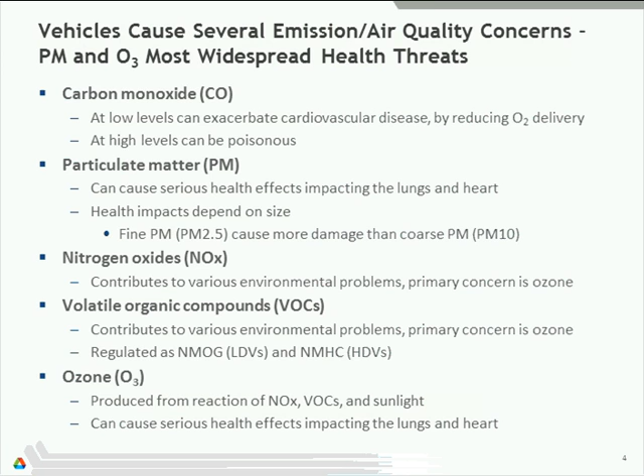So getting back to what we have done in this area, Argonne has supported Department of Energy's Clean Cities with various tools for the past 15 years. And in that time, we've been looking at air pollutant emissions as well as other emissions and environmental and petroleum use and other things like that.

So the first tool that we developed was AirCred, which estimated ozone precursor and carbon monoxide emission credits from alternative fuel vehicles for state implementation plans. That tool was around for about a decade. The next tool that we worked on was basically a tool for the Recovery Act grants to look at greenhouse gas emission and air pollutant emission benefits for those grant proposals.

And then most recently, we released the AFLEET tool, which estimates cost of ownership, petroleum use, greenhouse gas emission, and air pollutant emissions of light and heavy-duty vehicles. The tool is available on Argonne's GREET website as well as the AFDC if you haven't downloaded it already.

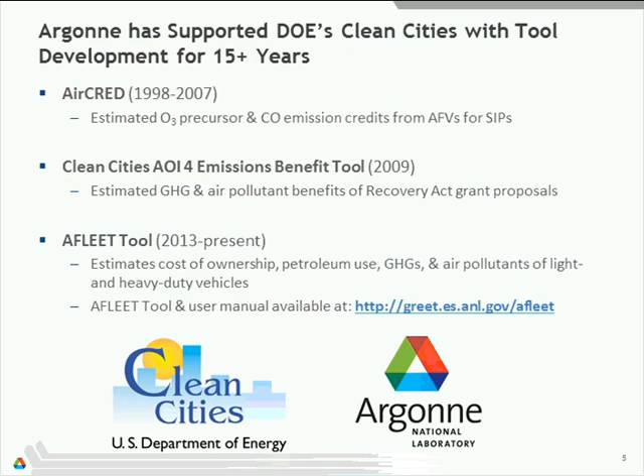So digging into what AFLEET does relating to air pollutant emissions, it really is based off AirCred, which we used for a long time. AirCred was a Department of Energy and EPA co-sponsored tool, and it was developed using EPA's MOBILE model, which is a model that calculates the emissions of different types of vehicles, light duty and heavy duty. It's a computer program. And then we also use annual emission vehicle and engine certification data to examine the relative impacts of alternative fuels and conventional counterparts like gasoline and diesel.

EPA is typically solely focused on gasoline and diesel, or historically has been. That's their charge, to really focus on the big emitters, so that's what they have focused on. But we do have data on alternative fuel vehicles and can make some assumptions to try and calculate, and that's what we did with AirCred.

So we followed that approach with AFLEET, but we now use EPA's MOVES model for gasoline and diesel emissions. The MOVES model really updated what MOBILE did. It basically improved the ability to estimate air pollutant emissions and showed that the NOx and PM emissions from vehicles were actually much higher than the previous estimates that MOBILE had done.

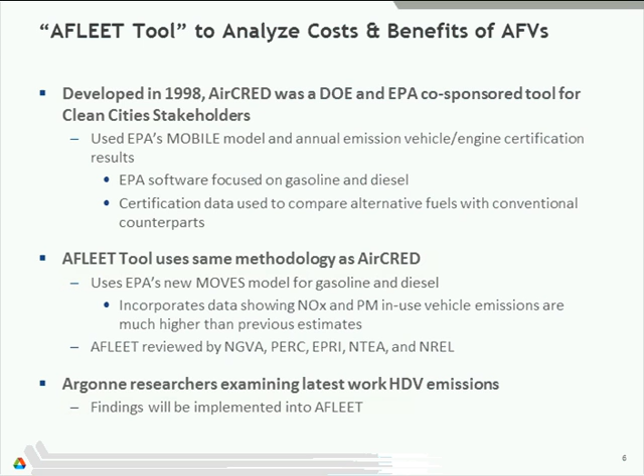And then as part of this process, we went through the various fuel associations to show them what we had done and try to get some peer review on the tool. So that was an important part of this process. And we plan to continue to update the tool. Argonne researchers have been examining the latest work related to heavy-duty vehicle emissions. That work is ongoing, but findings from that will be implemented into AFLEET once it is finished.

Now I'm going to talk about some air pollutant trends. One of the big goals of the Clean Air Act has been to reduce air pollutant emissions and improve the human health impacts of breathing air. And so we can see in this chart from 1980 to 2013, the ozone air quality has actually improved. The amount of ozone in the air has decreased about 33%. So there's been significant improvements.

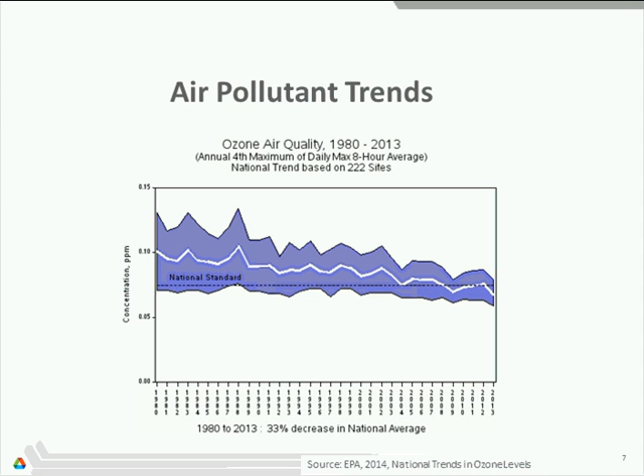For a long time, a lot of counties were in non-attainment. Just recently, there have been much fewer than there have been in the past. So that's the good news. Here's a chart from EPA that I think is an interesting broad look at emissions and the economy and all these things, because there's a lot going on that can impact air pollutant emissions.

We have the technology of the vehicles, how many vehicles are out there, how many miles they run, and then we can also think about other emission sources like power plants and industrial and manufacturing. And so some of those things have changed, where it might have gone offshore or things like that, but we do still see that emissions in general, this is total emissions, have decreased about 60% since 1980. So there's been significant improvement, and vehicles have been a big part of that.

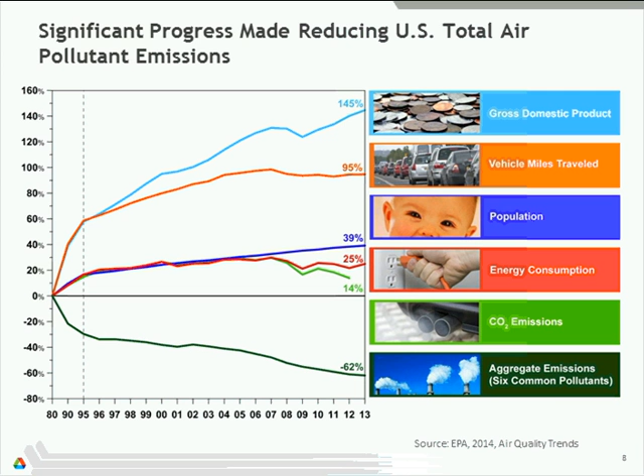One of the other indicators that we see is that vehicle miles traveled have increased pretty significantly since 1980. It's flattened out recently, but we still have seen emission reductions. So I want to talk a little bit about that.

The previous chart had air pollutant emissions combined together, and that's really not a good way to look at emissions. You want to look at them individually because they all have different impacts.

In this chart, we can see what percentage of motor vehicle emissions account for the total emissions from the U.S. We can see that carbon monoxide is primarily from light-duty vehicles, shown by the red bars. The blue is heavy-duty vehicles, so carbon monoxide is a major emission from light-duty vehicles.

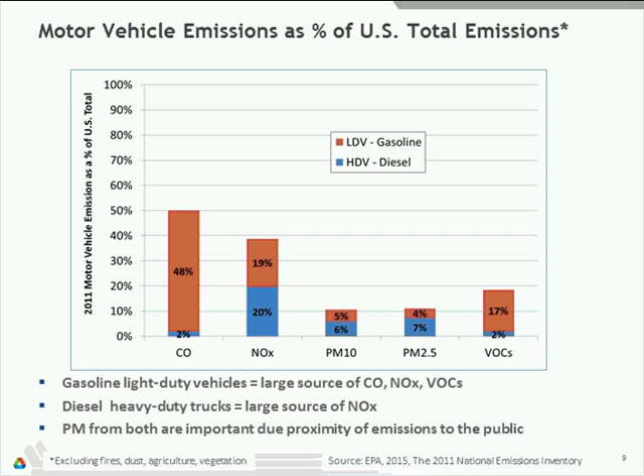For NOx, it's actually equally a big source from heavy-duty as well as light-duty. Particulate matter is lower than a lot of other sources, but it's important because of the proximity of the emissions to the public, so that's a big concern for vehicles. Similarly, there's larger VOC emissions from light-duty vehicles. That gives you a broad scope of motor vehicle emissions in relation to other sources.

The regulatory focus has been on ozone and NOx specifically, as NOx typically drives ozone emissions. VOCs can drive it in some cases, but typically it's NOx that people focus on, and also particulate matter. The reason is that 135 million people live in ozone non-attainment areas today, which is a significant portion of the U.S. population.

You can see large regions of California are in non-attainment, but also other areas of the country with major populations are in non-attainment areas. So it's a significant concern nationwide.

When we look at PM, about 63 million people are in PM 2.5 non-attainment areas. So a lot of the same regions, but a little bit less. Again, big concerns in California as well as the Northeast.

One air pollutant that isn't necessarily a major concern today is carbon monoxide. There are no counties, no population that is in non-attainment for carbon monoxide, so we've done a relatively good job at reducing those emissions.

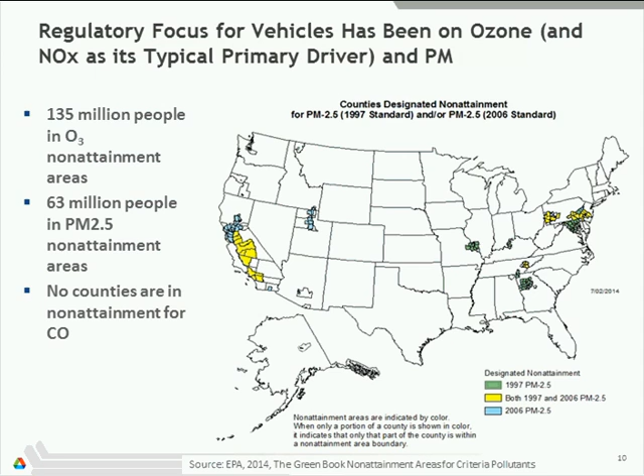To get to these very low levels, it's required heavy-duty vehicle engine manufacturers and vehicle systems to implement engine controls and after-treatment equipment such as diesel particulate filters for particulate matter, and selective catalytic reduction for NOx, typically called SCR, where you use a diesel exhaust fluid in a diesel vehicle to reduce NOx emissions.

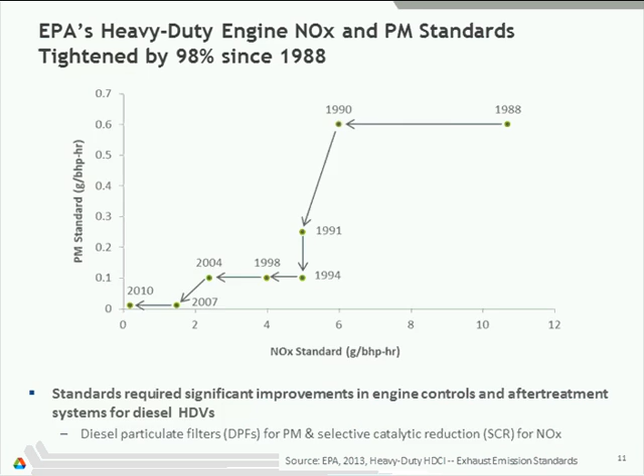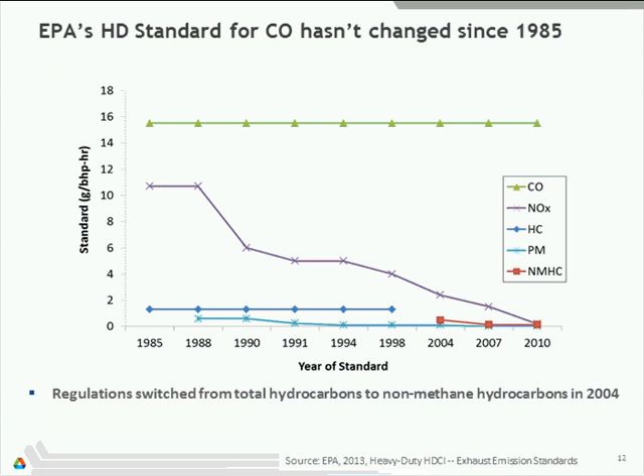Here's a chart of heavy-duty vehicle emission standards, and we can see in this top line that CO hasn't been a major focus for heavy-duty vehicles. They're a small contributor, so there hasn't been a lot of regulatory focus there, but the big reductions have been for NOx and PM, which have been reduced significantly.

Looking at light duty, we see similar trends. Carbon monoxide hasn't really been a huge focus, even for light duty vehicles, which are kind of the primary concern for the emissions, just because we're not really in non-attainment status in the U.S. for it. The focus has really been on NOx emissions as well as PM.

The CO standard kind of looks weird - why would they let the standard actually jump up? But really the changes have been to account for longer time frames of the vehicle. Jumping from Tier 0 to Tier 1 standards, they wanted to make sure the vehicle's emissions were good for longer periods of time, because vehicles are now lasting much longer than they used to. So there's concerns with deterioration of their emissions, that they can get much worse as they get older.

That's where alternative fuel vehicles may have some benefits, because they don't necessarily need certain after-treatment equipment that may fail in gasoline and diesel vehicles. So that's something to think about.

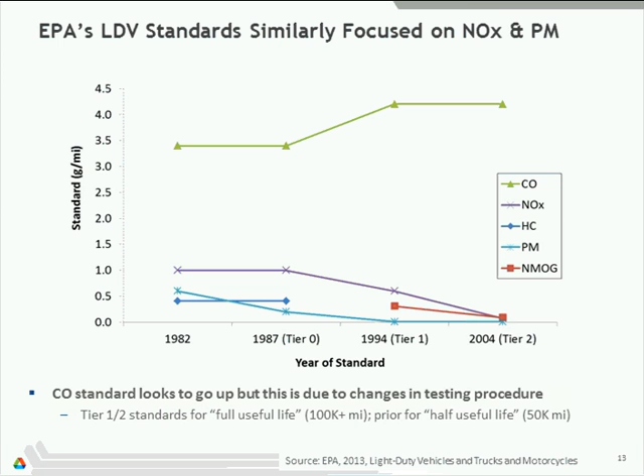There's been efforts to reduce emissions from vehicles by inspection and maintenance programs. So in your state, you might have to go and get your vehicle tested. That's the reason why, to make sure you're not a gross emitter. And if you are, then you're supposed to go get the vehicle fixed so it doesn't have those concerns.

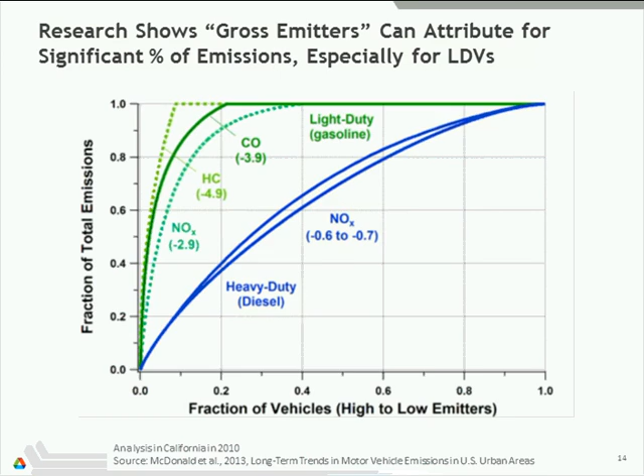So with those factors together, the tightening of emission standards, the pushing of increased onboard diagnostics and inspection and maintenance, we have seen a reduction in emissions.

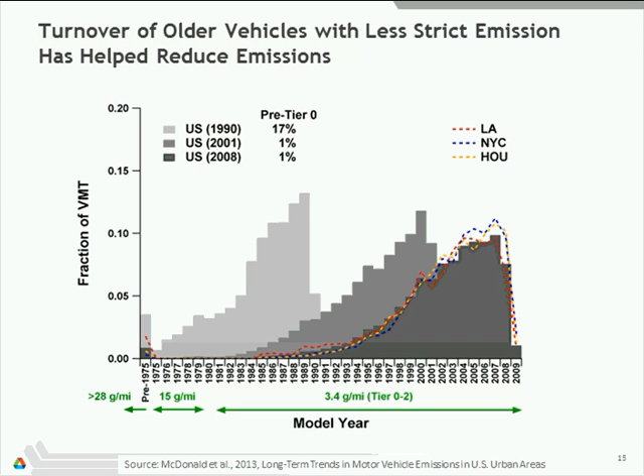What this chart shows is that there's turnover of older vehicles, and those vehicles typically were built under less strict emission standards. So as we go from 1990, where pretty much all vehicles were under Tier 0 standards—basically the initial standards with very high emissions—at some point we got rid of those, and next was Tier 1. By 2001, a significant portion of vehicles were Tier 1, and now today a significant portion are Tier 2. That's the progress that has been made to reduce emissions, at least from gasoline and diesel.

So where are we today, comparing a decade ago to the emissions from light-duty and heavy-duty vehicles? We've seen VMT kind of plateau—in the last 10 years it's maybe 5% higher than it was in 2002—but vehicle emissions have dropped between 40 to 50%, depending on the pollutant. So significant progress has been made, but there's still work that needs to be done.

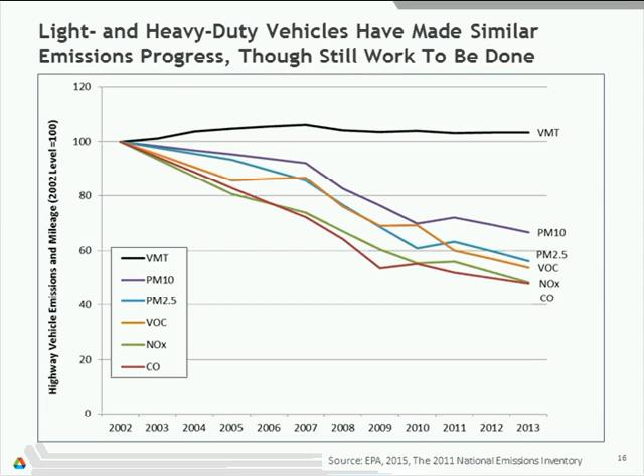Next, I'm going to talk about heavy-duty diesel and alternative vehicle emissions.

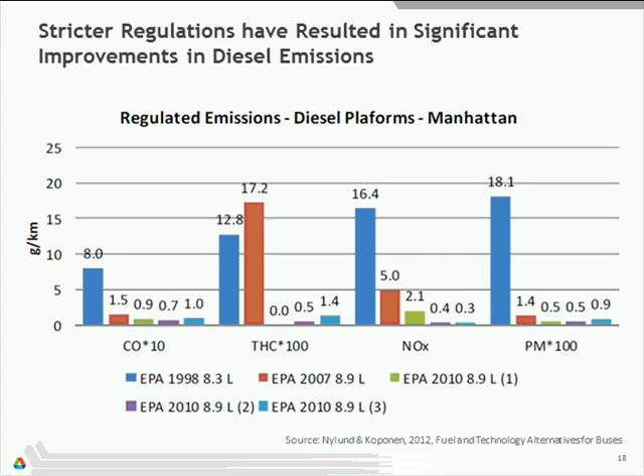Now looking at fuel effects—what about alternative fuel vehicles? One of the big concerns when people were trying to implement biodiesel was that it would increase NOx. Now that we've moved to the 2010 emission standards where diesel vehicles pretty much all need to use SCR to control NOx, we've seen that the emission control technologies have really overshadowed the fuel effects for biodiesel.

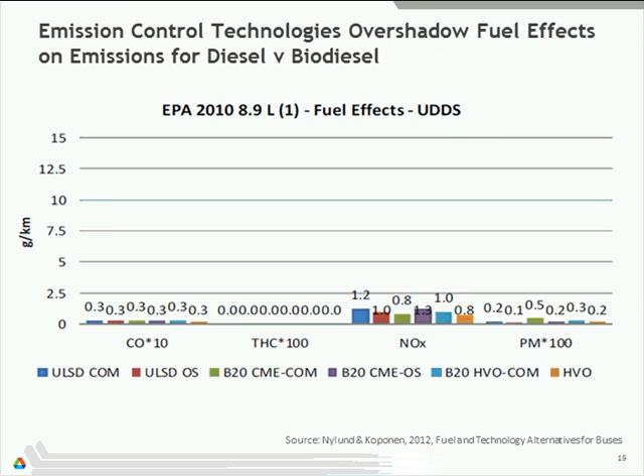Now, when we look at particulate matter, let's compare diesel and natural gas engines. Both have made great progress.

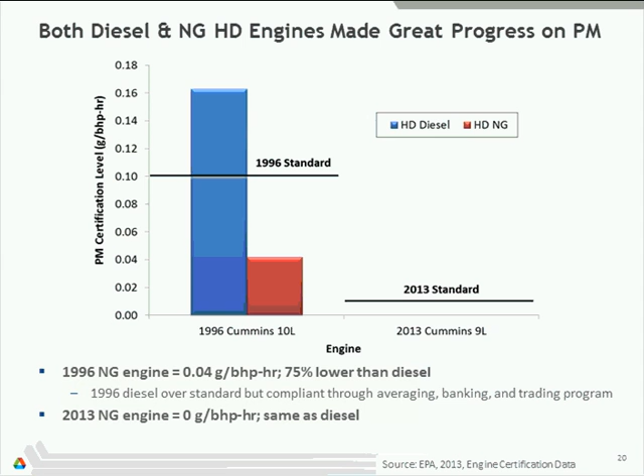In this first chart, we look at certification data. We see the heavy-duty diesel was actually above the standard when it was released in 1996, and the heavy-duty natural gas was significantly below, so there were significant reductions for the natural gas engine. Today, engines are getting certified at nearly zero emissions, so under the testing procedures, there's really no difference between natural gas and heavy-duty diesel. This shows that standards have really pushed emissions down for diesel, and you might not see alternative fuel vehicles showing any benefit for certain pollutants.

When we look at in-use testing, you can get different results because the certification standard tests vehicles one way, but if you test them while they're being used, you can get different results. California has done recent testing showing that diesel vehicles with particulate filters have nearly reduced particulate emissions down to zero, so they've made great progress. As part of this California testing, they've also done comparisons of alternative fuel vehicles, which I'll talk about in a bit.

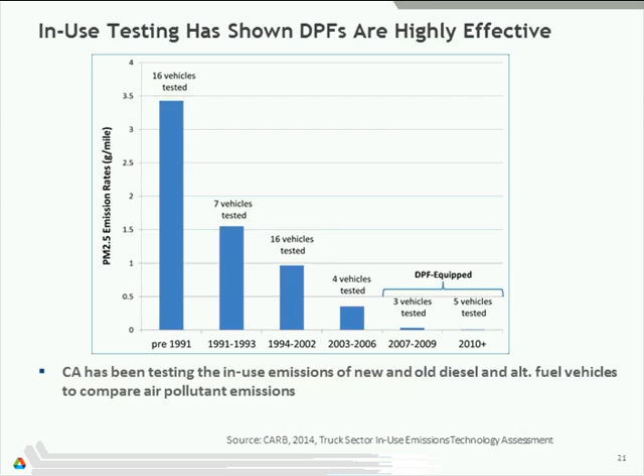We've seen similar certification improvements for NOx. Here again is the 1996 Cummins engine with diesel and natural gas versions — the natural gas version had significantly lower emissions. By 2013, the standards have tightened significantly. There's still some small benefit, but on an absolute basis it's pretty small, only 0.1 grams. Even though it's 50% lower compared to the older engine technology, which was only 33% lower, that older engine had a much bigger absolute value.

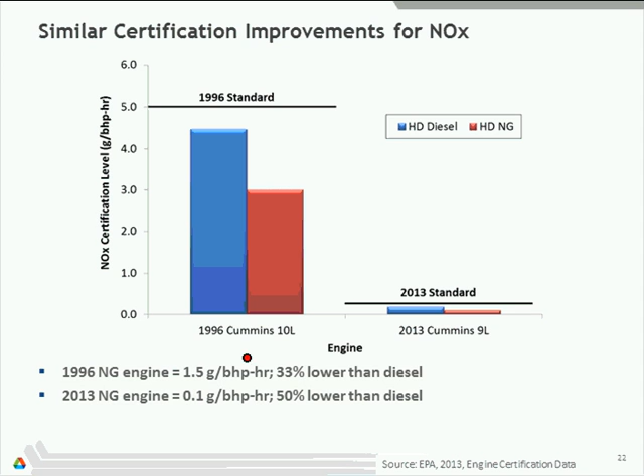When we look at in-use testing of diesel engines, it shows there still needs to be progress made. California tested some vehicles with SCR systems and found they were not always meeting emission standards, so they're concerned that SCR performance in the real world isn't the same as on a certification test. Some real-world concerns about diesel SCR include cold starts, operating conditions that won't get the SCR to work properly, and deterioration of the after-treatment equipment.

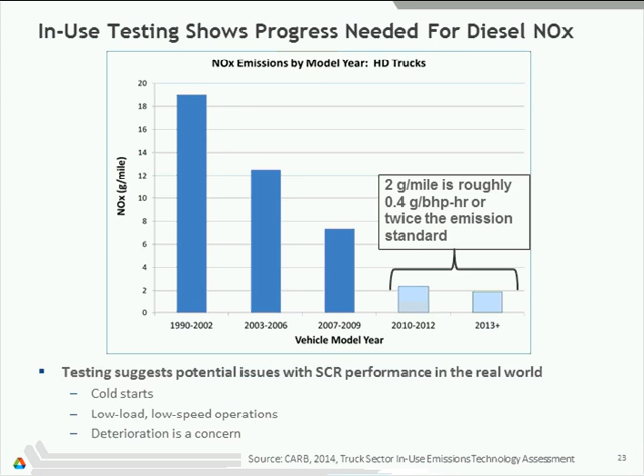I have a couple more slides on this because it's an interesting area, and it's really where the regulatory focus is. Testing has shown that SCR is highly effective at highway speeds, but there's a big potential for off-cycle emissions. This chart shows diesel hybrids and natural gas vehicles — all show very, very low emissions at highway speeds, 40, 50 miles per hour. The after-treatment equipment on diesel works fine, and natural gas is low in general.

But once we get into lower speed driving conditions with lots of stop and go, or when you're just starting the vehicle and it's warming up, there's potential for higher diesel emissions. That's concerning to air pollutant regulators because even though certification data shows very low emissions, you don't actually see them in the real world. For natural gas, these little triangles show that they actually operate pretty well even at these lower speeds and stop-and-go driving. That's been an interesting recent testing result.

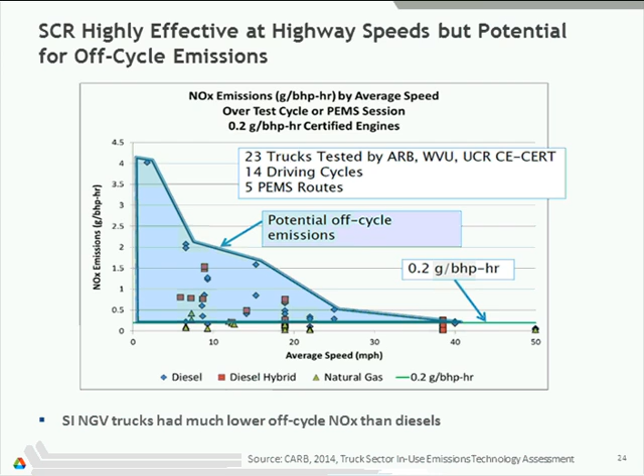California looked at different scenarios of driving natural gas drayage trucks or port trucks in different duty cycles — a near-dock situation near the port, local delivery, and a farther regional haul where you're driving on the highway. They found that diesel emissions were significantly higher in the near-dock or port operations, slightly lower in local operations with more stop and go, and pretty low in regional operations.

But when we compare them to spark-ignited natural gas or HPDI natural gas, diesel emissions are significantly higher, especially as you get into port-type driving cycles where the emissions are very, very high. The natural gas trucks don't exhibit this concern because they don't use SCR. This is a big concern, especially in California, for those interested in making sure ozone emissions are very low.

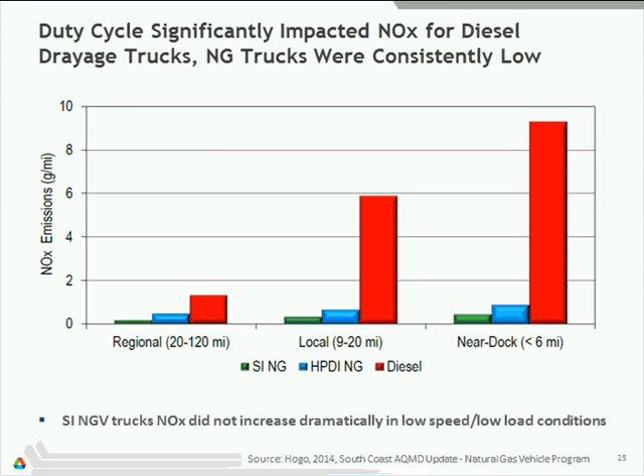Now moving on to a different pollutant, carbon monoxide. I get a lot of questions when we do fleet analysis that, strangely enough, natural gas isn't always cleaner, and alternative fuel vehicles aren't always going to be cleaner. A good example of this is carbon monoxide.

Spark-ignited heavy-duty natural gas engines historically have had higher carbon monoxide emissions, and even today their emissions are much higher. The reason is that diesel engines use a different type of combustion called lean burn, meaning there's more oxygen available to oxidize carbon monoxide into CO2.

Spark-ignited natural gas engines use a different type of combustion called stoichiometric. There's less oxygen available, and thus higher emissions. They're all under the standard, significantly so. Without significant push from regulators to add after-treatment, vehicle and engine manufacturers for alternative fuel vehicles might just feel comfortable with where they are without wanting to add a lot of expensive equipment.

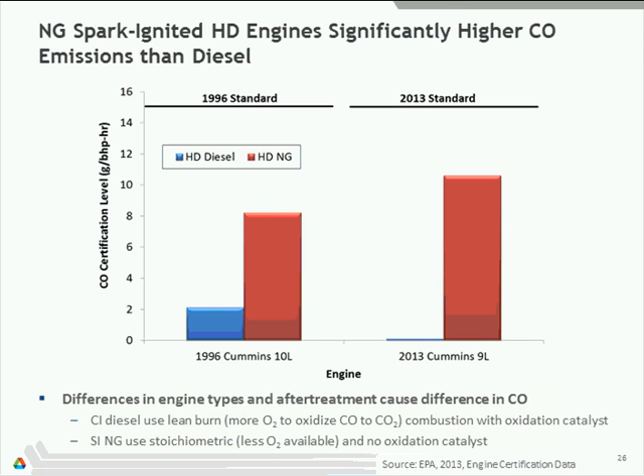Now looking at propane vehicles, there hasn't been a lot of testing of heavy-duty propane, but a recent analysis as part of this California study has done a little work on that. The other area that has shown some results for propane is certification data. When we look at certification data, we see some emission benefits for NOx for recent propane medium and heavy-duty engines.

But in some cases they have higher emissions. They're still meeting standards, but their emissions can be slightly higher. So why does this potentially happen? Well, propane engines are conversions of gasoline engines, and what we found is that the deterioration factors—basically the way manufacturers estimate vehicle emissions at 50,000 or 100,000 miles—play a role.

They don't always just run the engine for 100,000 miles to see what the emissions are at that point—that would take a long time. So what they do is run some tests to see how the equipment deteriorates, and then apply factors.

What we have found is that for small volume manufacturers, which is typical of propane engine and vehicle manufacturers, their deterioration factors are actually higher than those of gasoline. The OEMs have the money to do more detailed testing to show their engines won't deteriorate, but propane often just gets factors from the regulatory agency from sometimes outdated tests.

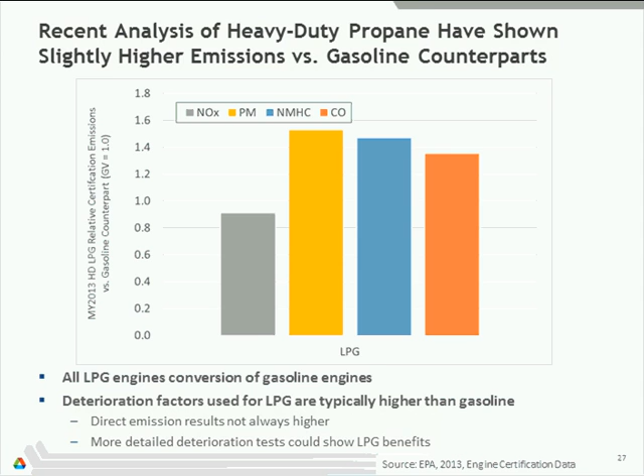The only real in-use testing we've found doing research on this has been on some pre-2010 standard propane vehicles and diesel vehicles. This means they weren't required to reduce NOx significantly, but we can hopefully still gain a little knowledge from this testing.

This testing was on school buses. What it found was that the NOx emissions for propane were actually very, very low compared to diesel. These diesel vehicles didn't have SCR, and if they did, we would expect diesel emissions to be lower. But this result is still pretty interesting—the propane had still very low NOx.

When looking at particulates, these diesel vehicles had particulate filters, and the results for propane show they're still significantly lower than those with particulate filters. Again, we see this trend of spark-ignited vehicles with stoichiometric combustion having much higher CO than diesel. Diesel is very low, so we continue to see that trend. But more work needs to be done in this area, and hopefully we'll see better results from that California testing.

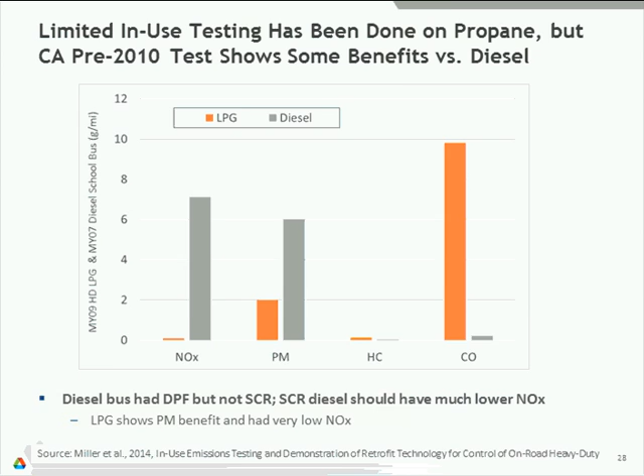So in conclusion for heavy-duty vehicles, we've seen that standards have become increasingly strict, requiring significant improvements in engine controls and after-treatment systems. Alternative fuels are possibly taking advantage of this by having simpler and less costly after-treatment. Emissions may be lower, or they might not be, but they don't necessarily need particulate filters or SCR systems, which can add thousands of dollars to certain vehicle types.

We have seen some certification benefits for AFVs, but those benefits have diminished, at least on the certification side. There might be relative benefits—it might be 50% lower—but the absolute number is smaller. But more importantly than certification is what they're doing in the real world.

So in-use benefits are possible for AFVs, especially if diesel controls or after-treatment don't operate properly. And as I showed with the carbon monoxide concern for spark ignited engines, alternative fuels may not always be better for every pollutant due to differences in engine types and controls and after-treatment.

California has recently adopted some optional NOx heavy-duty standards to incentivize further reductions. You can certify at basically 50% lower, 75% lower, or 90% lower than the actual standard. They've provided funding through the Carl Moyer program to get grants to actually get these engines out there, primarily working with natural gas vehicles to see if they can achieve these very low NOx emissions. They potentially could go to a standard of 0.02 instead of 0.2, and that would push diesels even further. If the natural gas vehicles are able to meet that standard, that would show a benefit and hopefully increase their sales.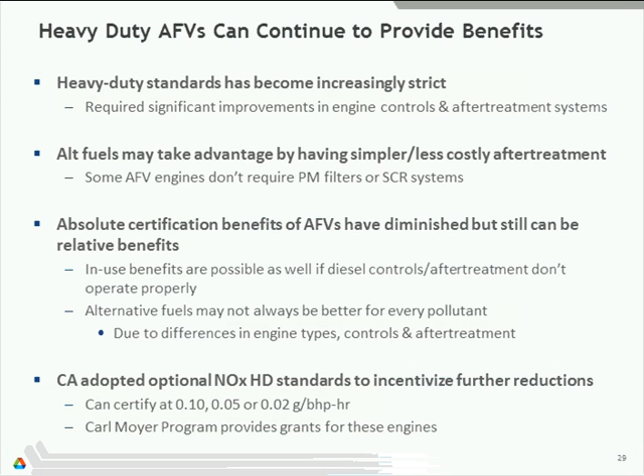Now I'm going to talk a little bit about light-duty gasoline and alternative fuel vehicle emissions. Some recent analysis we've done on light-duty AFVs and hybrids has shown that they can typically show some emission reductions compared to their gasoline counterparts. It often depends on the model of vehicle, but for compressed natural gas, we can see 20% reduction in NOx, 40% reduction in VOCs, and 25% in CO.

E85 vehicles also show some benefits as well, close to 30% reduction for NOx and CO, and then maybe 5% reduction for VOCs.

We have the same kind of issue for propane that we saw for heavy duty, that for NOx and CO they're pretty much the same, maybe a slight increase, and then VOCs are higher for the propane vehicles. I think similar issues with deterioration factors need to be addressed there, that if the small volume manufacturers of propane light duty cars and trucks can show that their emissions don't deteriorate that fast, we will see that these vehicles have some air pollutant emission benefits.

I haven't talked too much about hybrids at all, but wanted to throw that in as well, that hybrids can show emissions reductions as well.

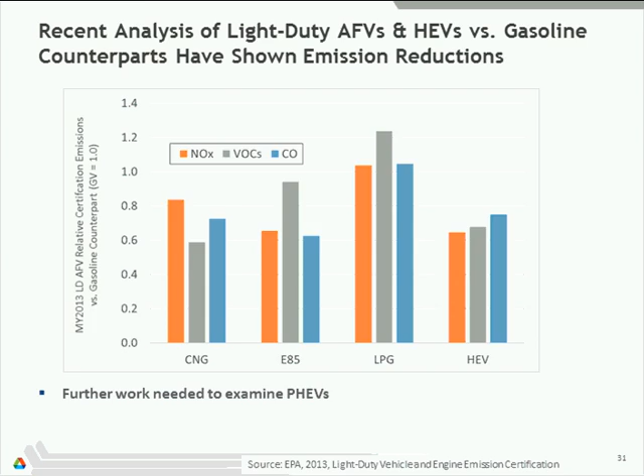One of the interesting trends for light-duty vehicles is that there's been significant interest in gasoline direct injection vehicles. The market share of gasoline direct injection has increased from about 4% in 2009 to nearly 40% in 2014. The reason OEMs are doing gasoline direct injection is that they can use smaller engines with turbocharging, and then maintain the performance people want, but also improve fuel economy.

The problem with these vehicles is testing has shown that they can increase the amount of particulate matter on a mass basis, so they have more particulate emissions, and they're also increasing the number of fine particulates. So there's big concern there that if we are pushing these vehicles to improve fuel economy, they might also be causing some health concerns.

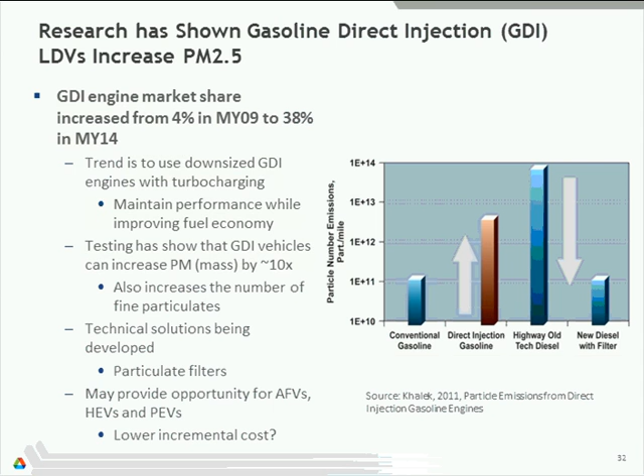There have been some technical solutions brought about to try and address these issues, such as a particulate filter, similar to what is happening with heavy-duty diesels. This may provide some opportunity for alternative fuel vehicles or hybrids or plug-ins, potentially at a lower cost, where these vehicles might not need a particulate filter, which could reduce the incremental cost. I think that's still a bit of a question mark, but an interesting area to think about.

For light-duty vehicles, it's similar trends as compared to heavy-duty. The standards have become increasingly strict. It's required significant improvements in engines and controls, and there's really been a push to continue to reduce passenger car and truck emissions. EPA's Tier 3 standards are being coordinated with California standards as well as some of the greenhouse gas standards.

And what these standards are going to do is increase the durability of gasoline and other light-duty vehicles. They're trying to push, again, to make sure that there's not gross emitters. And then by 2017, this rule is going to reduce sulfur content by 2/3, and it's going to reduce NOx, VOCs by about 80%, particulate matter by 70%, and carbon monoxide by 75%. So there's going to be significant amounts of reductions in emissions from new vehicles.

Gasoline and alternative fuel vehicles, the same. What is potentially an advantage for alt fuels is that they may have simpler, less costly after treatment. So, as I mentioned before, the direct injections may require particulate filters. So the stricter standards still pose some challenges for AFVs as well. They have to meet these really strict standards, and it's going to take engineering work to get there.

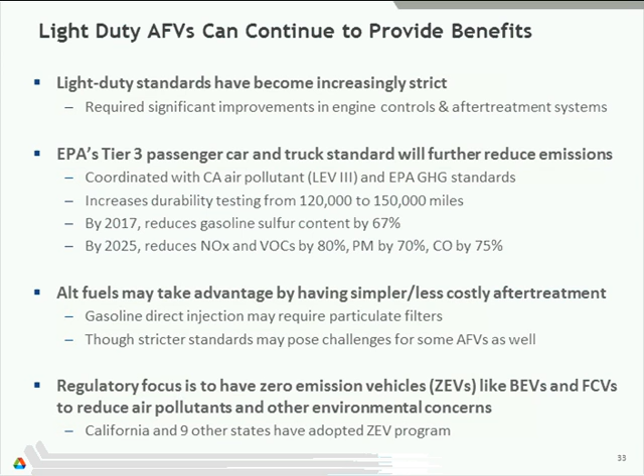And the regulatory focus is really kind of pushing towards zero-emission vehicles like battery electric, all-electric vehicles, and fuel cell vehicles to try and reduce the air pollutant and other concerns from these vehicles. So California and 9 other states, a lot in the East Coast, have adopted the zero-emission vehicle program to kind of push vehicles to be zero-emitting.

So in summary, AFLEET has been using the EPA's MOVES model to estimate the emission certification results to compare alternative fuel vehicles and conventional counterparts. We're updating this based on the latest research that's being done in the area to try to incorporate more in-use testing and understand that situation.

EPA's light and heavy-duty standards have become increasingly strict. Both conventional and alternative fuel vehicles have made significant reductions to meet those standards. And what we've seen is alt fuels continue to have some emission benefits. The absolute benefits are smaller than they were in the past. Everything's gotten cleaner. But there still are some relative benefits. And we also have seen some testing that has shown that there are possibly in-use emission benefits as well for some alternative fuel vehicles. Future standards will pose potential opportunities and challenges for AFVs.

The potential challenge is to do the engineering to meet these standards, but the potential benefits are that they, again, could have less costly after treatment, and they have the ability to get to zero emissions if you go to battery electric or fuel cells.